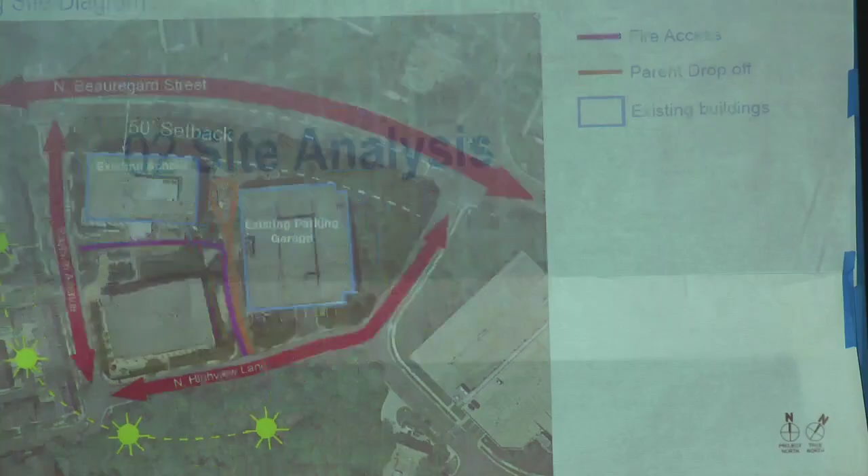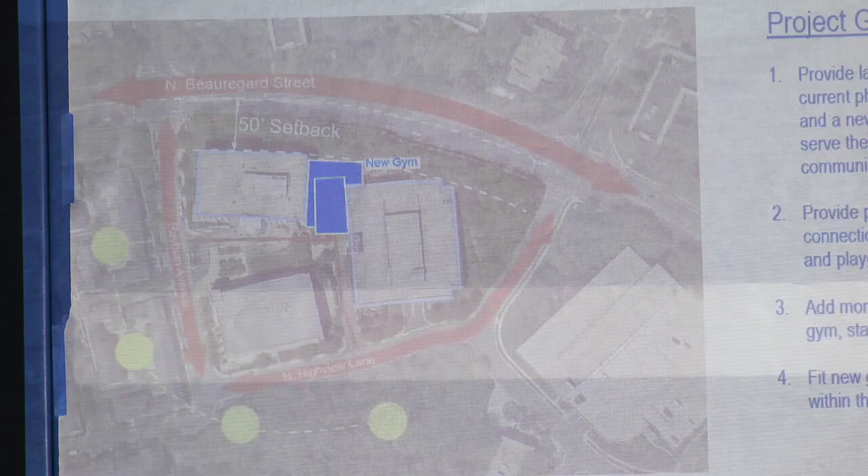So our site, I'll just point to this. We're sitting in the existing school about here. I think everyone knows the garage is here, and we have access and drop-off currently occurring here, and fire and emergency access that runs in this direction. We have Beauregard Street to the top with a 50-foot setback, Rayburn Avenue, Highview Lane. We have the parking garage here, and the adjacent office building here. You see at the bottom the sun angle, so we look carefully at the sun to make sure the building's getting enough natural light.

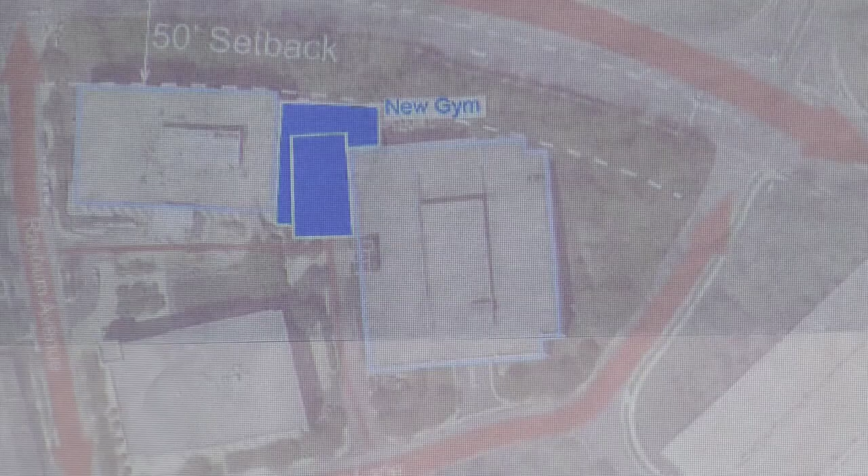This project is in blue, so it's a new gym with the gym volume, the higher gym volume being this rectangle, and then the support sort of around it. It's a pretty clear and clean diagram. The unique thing about it is it's elevated and connecting this building to the parking garage while allowing access underneath.

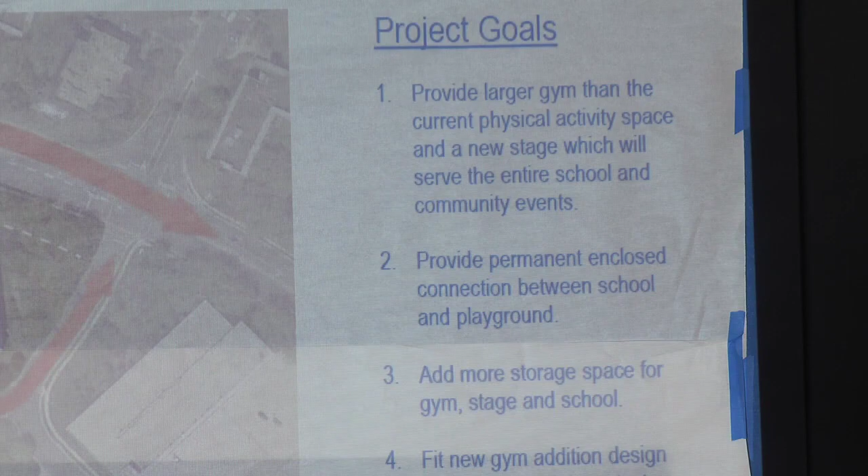There are several project goals we should go through. Provide a larger gym than the current physical activity space we're in—this is that room now. It'll have a new stage, which will accommodate a lot of programs at the school that have been so successful. We'll provide a permanent enclosed connection between the school and the playground. Right now there's a bridge connection on the 3rd floor that connects over; this will be indoor and conditioned. And we'll get more storage space for the gym, stage, and the school.

One of the other goals, obviously, is to make sure it fits into the context. There have been a lot of people we've reached out to and collaborated with, including not only the school system, but the city of Alexandria.

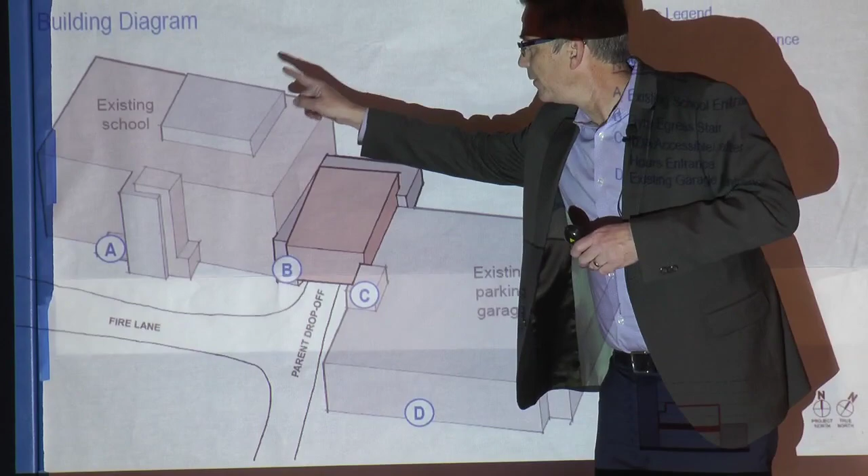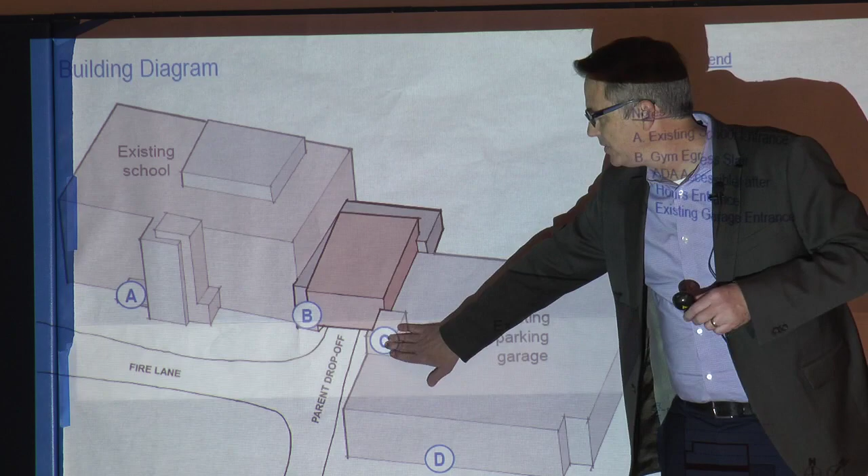So the proposed design, this is the axonometric. If we look at letter A, that's the existing school building—we're down in this location. That's the elevator core and the stair tower we added at A. The gym building is B, with the larger gym volume and the support in the gray color, and in the pink color, the new gym. C is the stair tower to the existing parking garage, and D is the existing parking garage. The building will sit, as I said, between the parking garage and the school building at the third floor line.

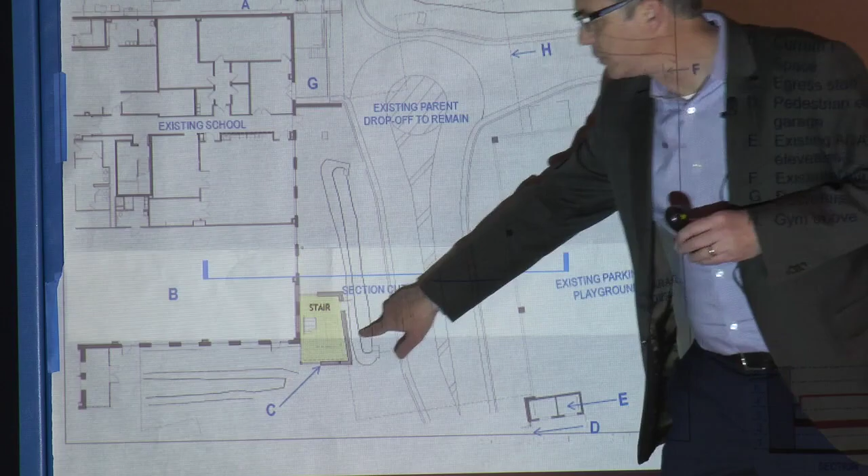Okay, so floor plan level 1. Really, the building has a minimal impact to this level, and it's primarily just this stair. This is one of the emergency stairs out of the gym. There will be a series of columns carefully located around the existing drive aisle and existing stormwater management.

We are utilizing one of the piers, the foundations to the existing bridge.

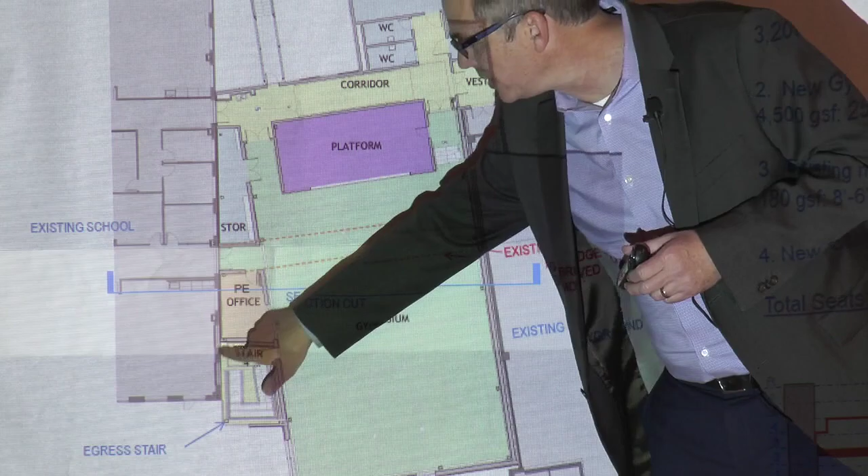The third floor plan, building in addition will connect in at 2 levels, 2 corridor points. One here will go past the PE office, an occupied office, and you come into the main gym space. Below that is a stair, and above it is storage. This will be the platform or stage that will be used by the school.

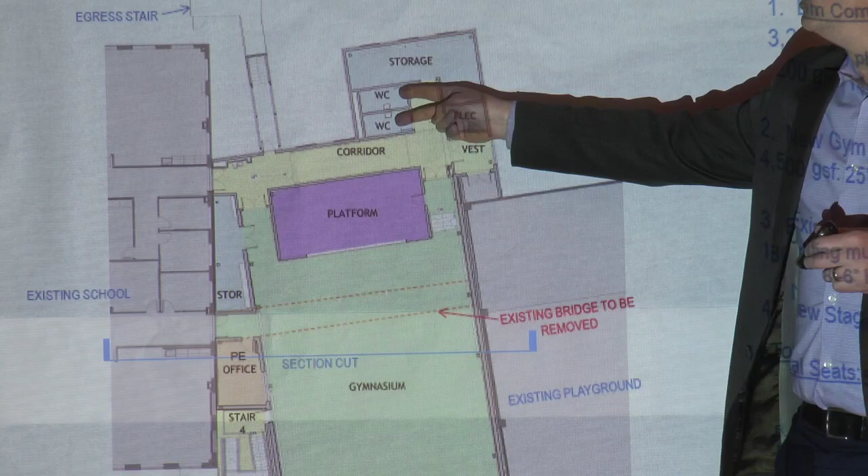Above that is a corridor which replaces the old bridge shown here in dashed red line. That'll be removed and replaced by this corridor, which as I said earlier will be conditioned. Also a couple of toilet rooms here, some storage, an electrical closet, and a vestibule that connects to the top of the existing parking garage, which is where the playground is for the existing school.

There's some specificity here. We don't necessarily need to go through it, but in summary, it's at the third floor, as I indicated before, has a stage, and it's a gym that's right-sized for this school.

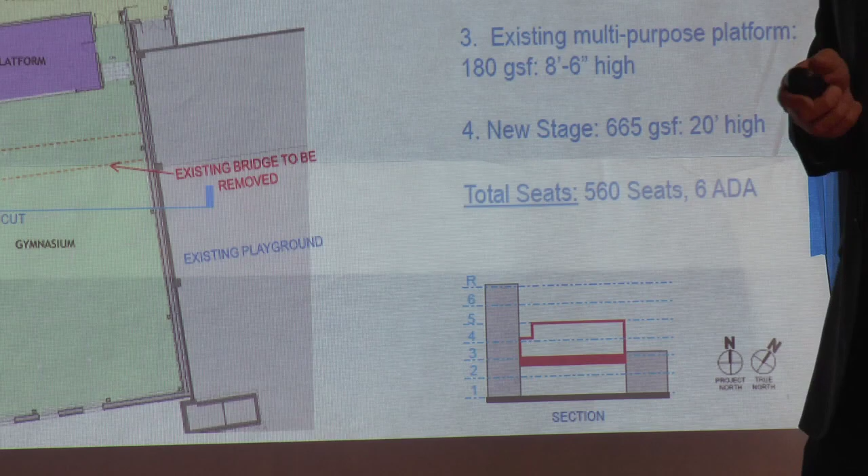On the exterior, when we were looking at the exterior of the building, we looked very carefully at the addition we had done previously when we turned the office building into the school, at least the first 4 floors. We had used metal panel, we had used brick, we looked at the solar orientation and dealt with sunshades and devices. And we also kind of announced its entry with both signage and a canopy that's welcoming, that also provides security for the students to the school.

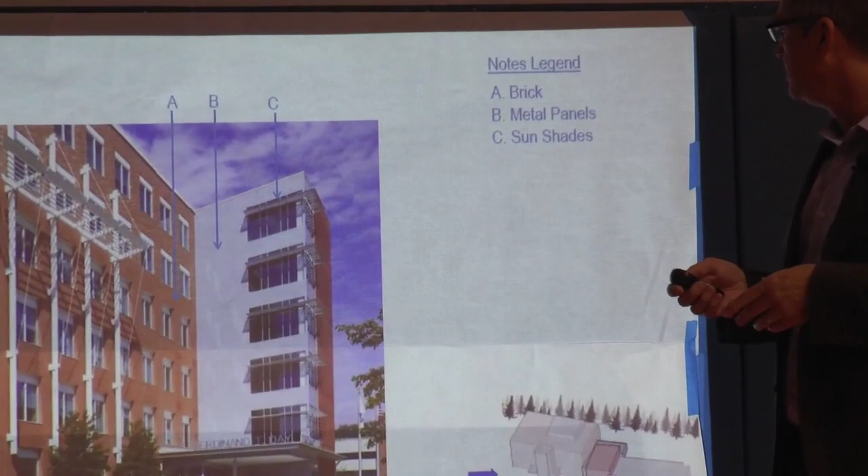This is our proposed design. This is the existing building you see here. This is the gym addition, and this is the parking garage.

You can see what we tried to do is we have utilized a metal panel system for the cladding of the building with a kind of reddish brick color for the main box of the gym, with the support spaces using a gray.

That is the fire stair I pointed out earlier.

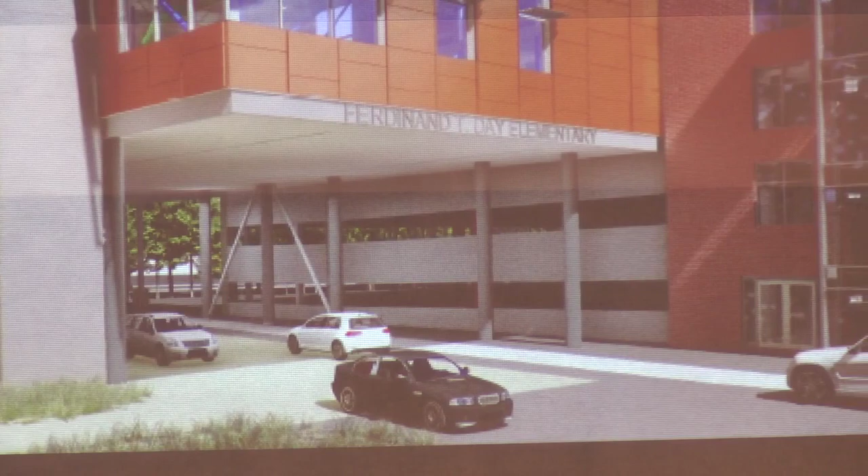A close-up shows you the gym volume that is suspended. It shows you drop off and pick up, which Pete Bloom and I will go into in just a minute, showing how you can drop off and pick up after the construction is complete. We have sun shading devices, as well as nice open views to the sunlight for the students.

And then we have a fire stair that is open and utilizes some of the existing bridge to clad and protect the occupants of that fire stair. This shows you the existing garage core, which has elevators and stairs, and then the parking garage beyond.

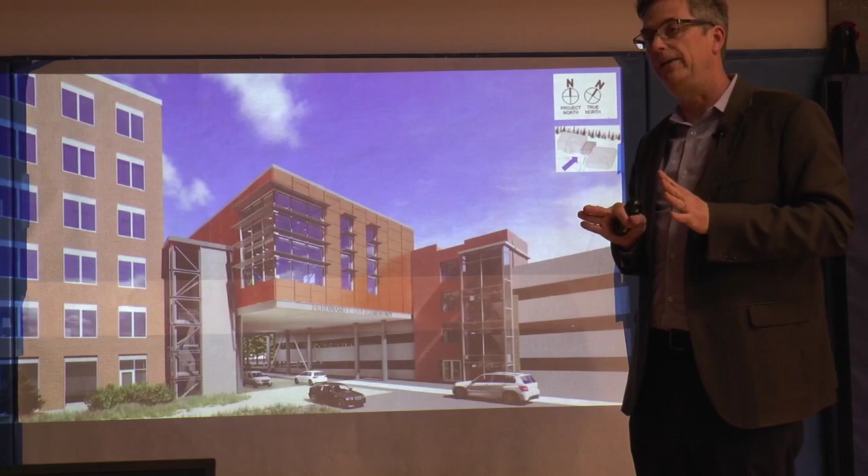The aluminum panel has a texture to it, has a raised sort of vertical fin, and has a kind of staggered coursing. We're trying to tie that back to the original school in both its design concept. When you get to the stair and the other support, it's a more quiet gray metal panel that's stack bond in general. Pete will get into the details in just a second.

Pete, let's transfer this over.

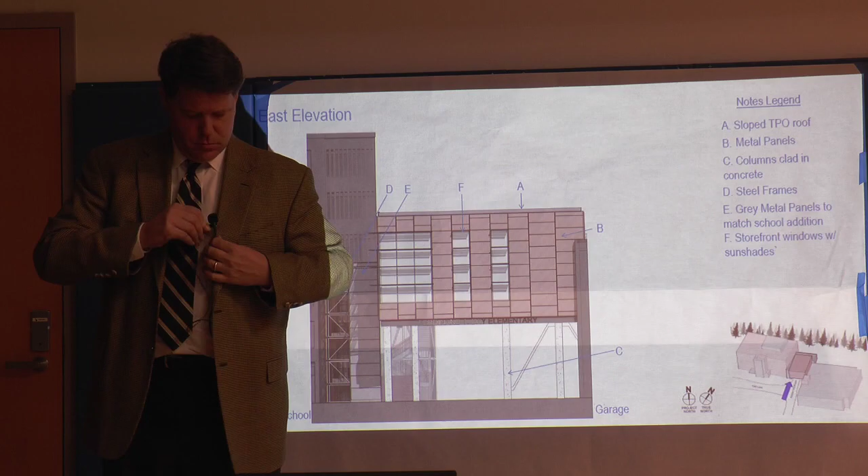Paul said, I'm Pete Bloom. I'm with Hord Coplan Macht Architects. I've been working with the school and Whiting Turner on this project for some time now.

What we have here is a set of drawings. They're kind of abstract, called elevations, and it's a projection of each elevation of the building as though you're floating in the air looking at the elevation straight on.

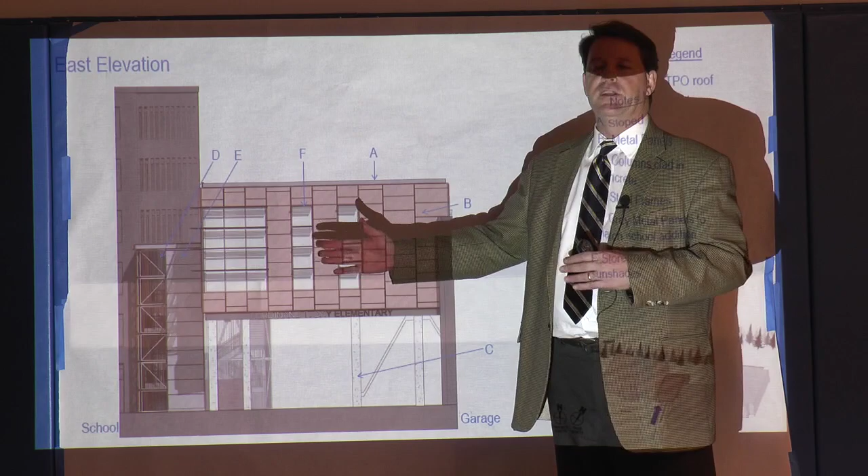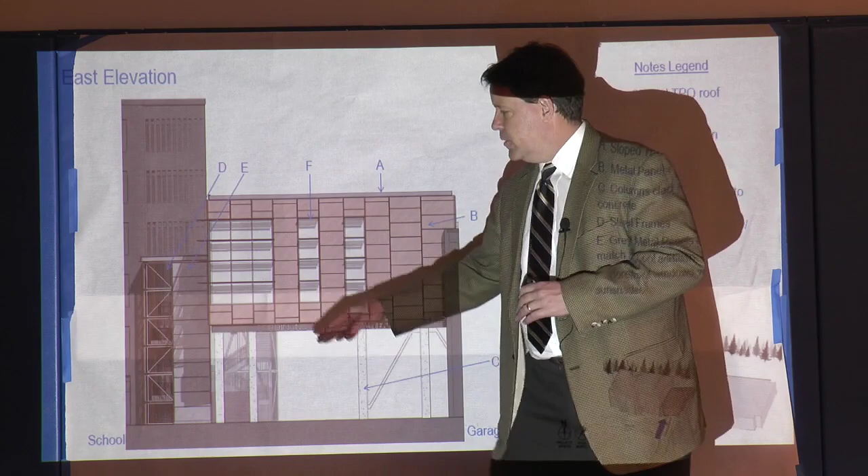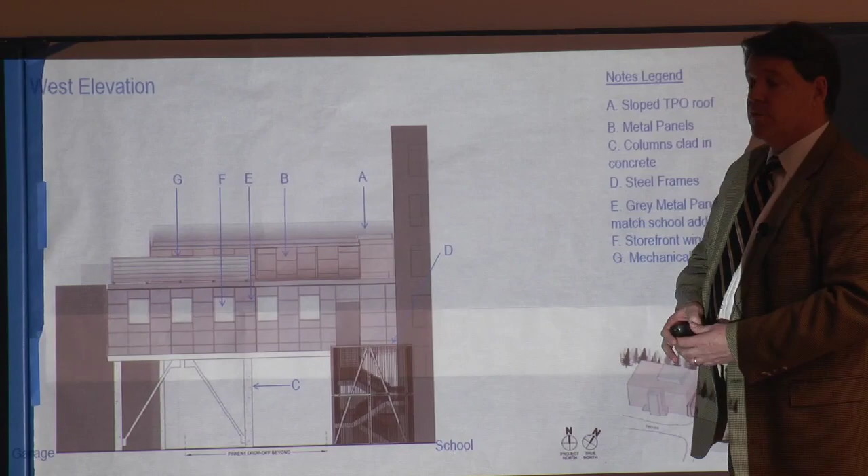This is a view from North Beauregard, the backside of the building. You see there's a one-story element here where we have storage in the corridor that serves the back of the building. There's a mechanical equipment screen up here where we're going to have our mechanical equipment that provides all the cooling and heating for the building. And then you can see beyond that, you have the two-story volume of the gym.

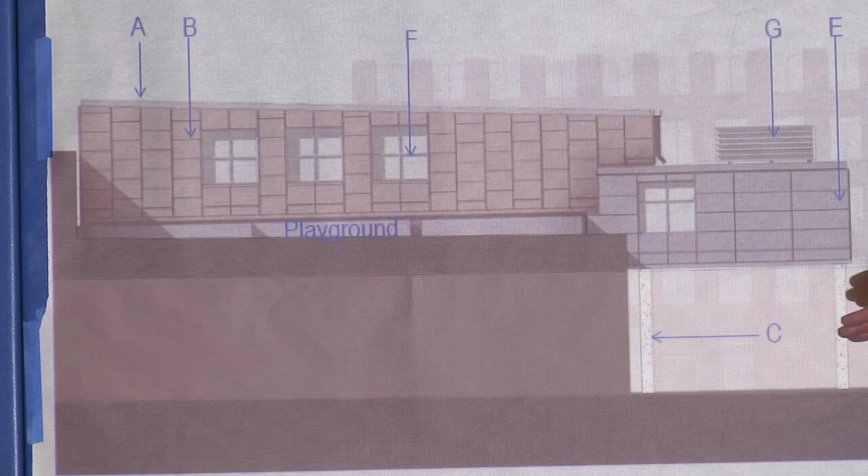This is a view as though you're standing on the playground looking at the new addition. The children's playground is in the foreground. On the top level of the parking garage, you'll see these large windows into the gym. The school is beyond over here.

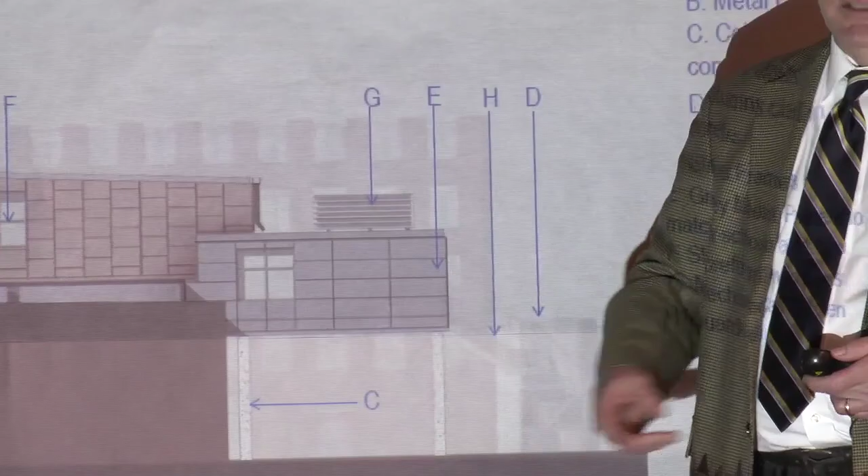Here again you see the mechanical screen, and then this is the one-story element having a corridor that comes out and has a window at the end of it right there. The interiors we've spent a lot of time developing now, and we focus of course on the gym.

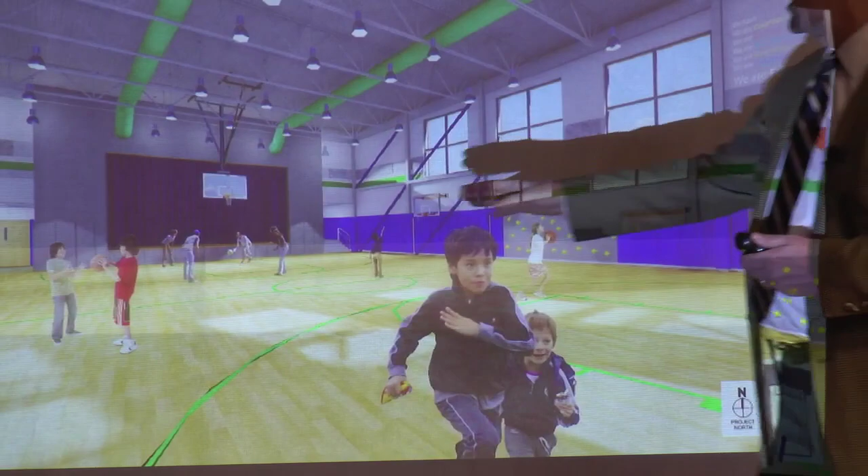This is a view looking from that big window back toward the stage, up toward the Beauregard end of the building. You can see we propose a large stage curtain here behind these play courts.

We'll have basketball hoops in the space, and like this room, we'll have floor markings for soccer and volleyball, with provisions for volleyball sleeves. There will be 2 basketball hoops on each side so they can have cross-court play, and a basketball hoop at each end for full court play. The volleyball court will be oriented the long way facing toward the stage.

Again, you can see that the green ducts are fun. The school's emerging colors are blue and green, so we picked up on that, which is why we limited these accents to blue and green.

We're reusing this climbing wall in the new space as well, taking it down and relocating elements from here to the new space, on the east wall of the gym. And up here, we're going to include a statement about the school, one of the school slogans, in the space.

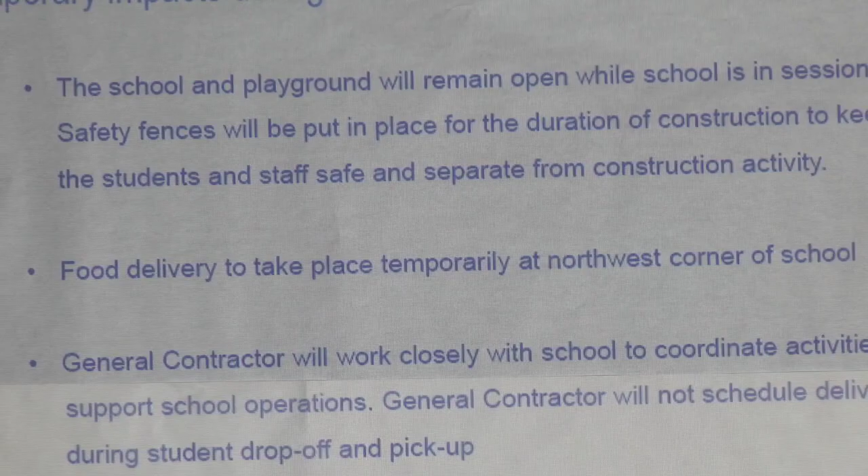During construction, there will be some disruption to normal patterns of activity in the school, and we wanted to address some of those points raised in our first presentation. I wanted to reiterate that the school and the playground are going to remain open while construction is going on. Safety fences will be put up during construction to prevent children, and passers-by, from getting into the site.

Food delivery to the school is going to be disrupted. Its normal delivery place is right here at the end of the parent drop-off. There's a loading dock, and it will need to move to Rayburn Avenue, and we have a slide later that will show you where that is.

Most importantly, Whiting Turner, our general contractor, is going to work closely with the school to work around events and daily scheduling, so they won't schedule deliveries to the construction site during drop-off and pickup times when the site is busiest. They're working closely with the school and ACPS to figure out what events they need to plan around, and building that into their schedule.

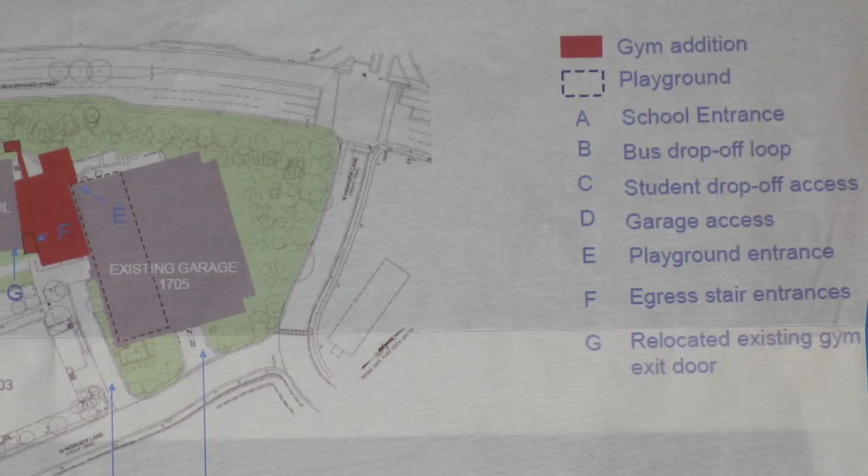This is a site plan showing some of the elements of the site. Over here, A is the existing entry to the school. B is the bus drop-off loop. G is going to be a new door that we're going to put right in the corner of the room over there. We're going to relocate that door to provide access so that during construction, there will be two means of egress directly out of the gym.

This is going to remain the garage access, and this will be the parent drop-off loop access in the future. This is going to be one of the egress stairs, and this is the secondary egress stair. If you want to go to the playground, you'll see we have some other slides—you'll come to this existing lobby where there's both a set of stairs and some elevators.

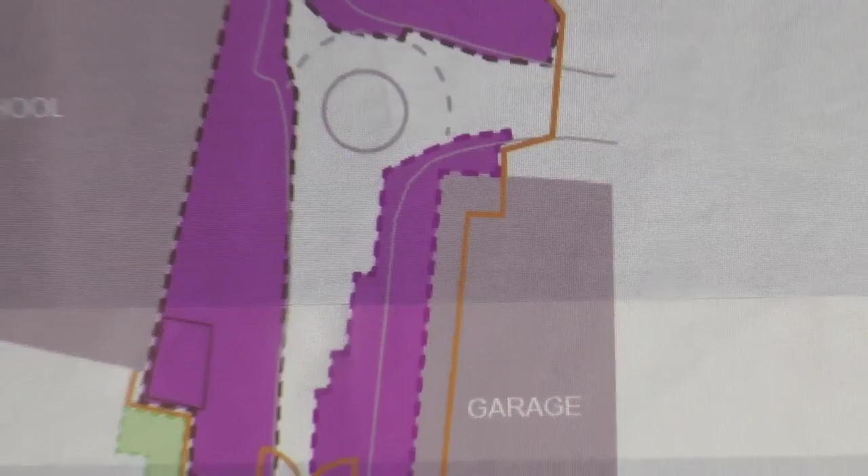This is a diagram showing a blow up of the site you just saw, focusing in on the space between the garage building and the school building. What we've shown is this orange line, which is the limits of disruption to the site.

We'll have a fence around all of that so the children can't get in. The purple area will be the limits of disturbance, which is really the limits of what we think is going to be dug up during construction.

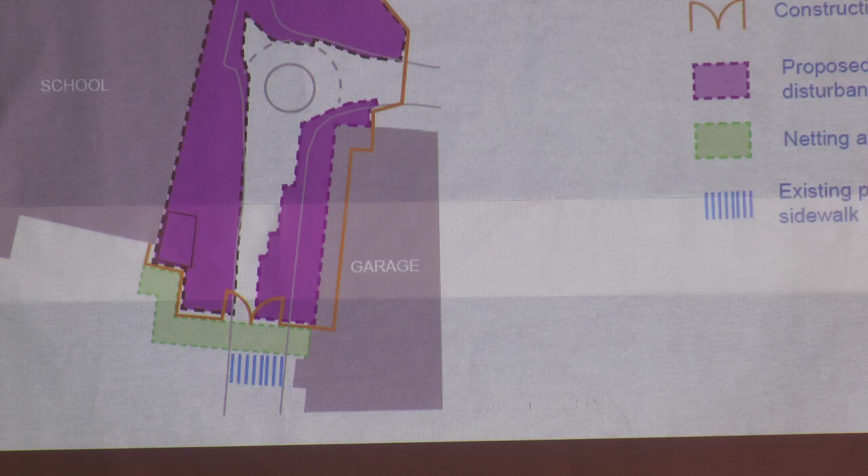This is currently the pedestrian crossing to the garage, and that's going to remain open during construction. Students will cross across here, and in order to provide as much safety as possible, there's going to be construction netting hung off the south facade of the building to capture any items that might fall.

And then this will be the proposed construction entrance right here.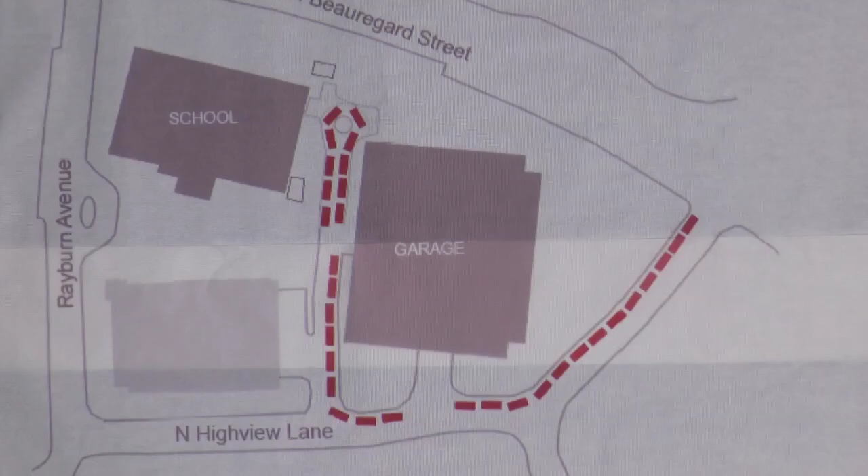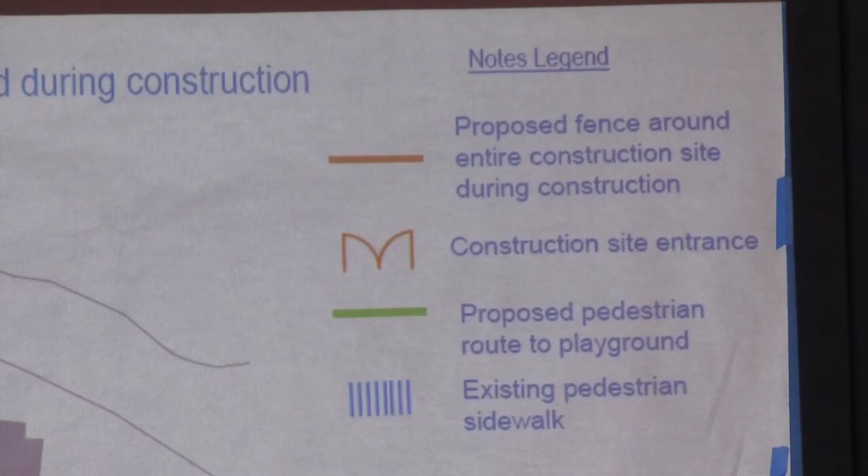Importantly, the children won't be able to use the bridge over to the playground because that's one of the first things that has to come down. But during construction, their path to the gym or playground will be safe. They'll come out the front door, walk down the sidewalk, come across the pedestrian connection, and then use the stairs to go up to the playground. So that's going to be protected.

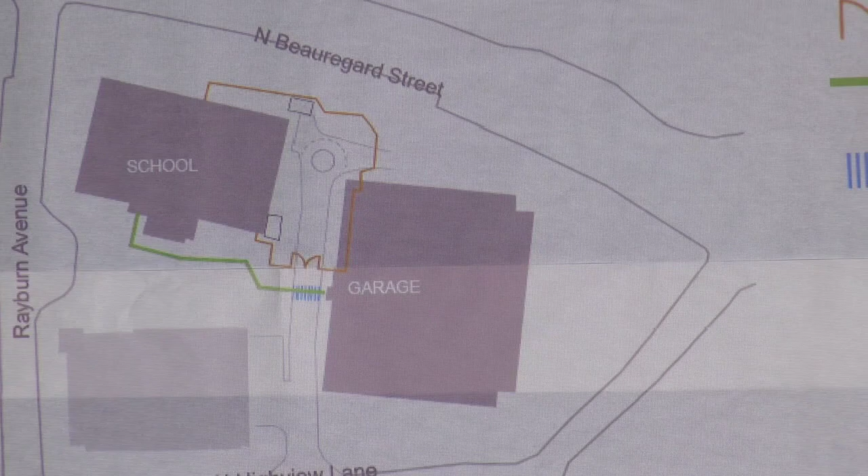Again, as I said, the netting will be over here so that if there were any stray debris, it would be caught.

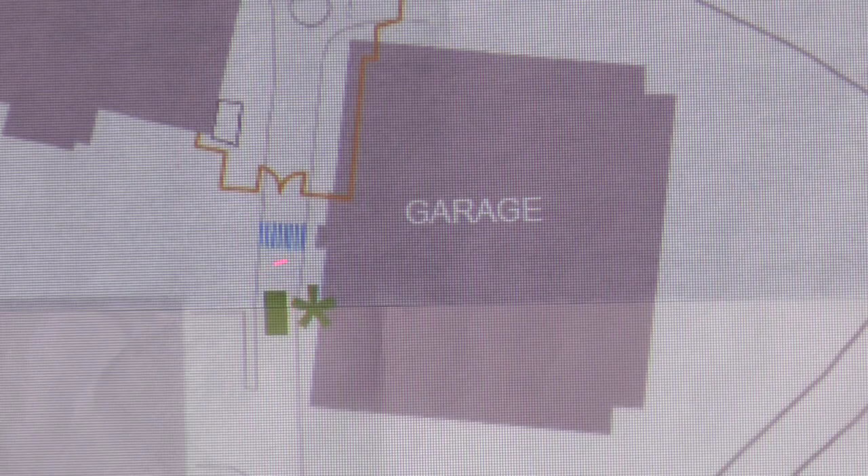This slide shows some of the temporary changes to things like dumpster location and food deliveries. Because the current location for the dumpsters, both garbage and recycling, and the food loading dock, won't have access during construction, we're proposing moving the garbage and recycling to temporary pads on site that trucks can back up to or pull into.

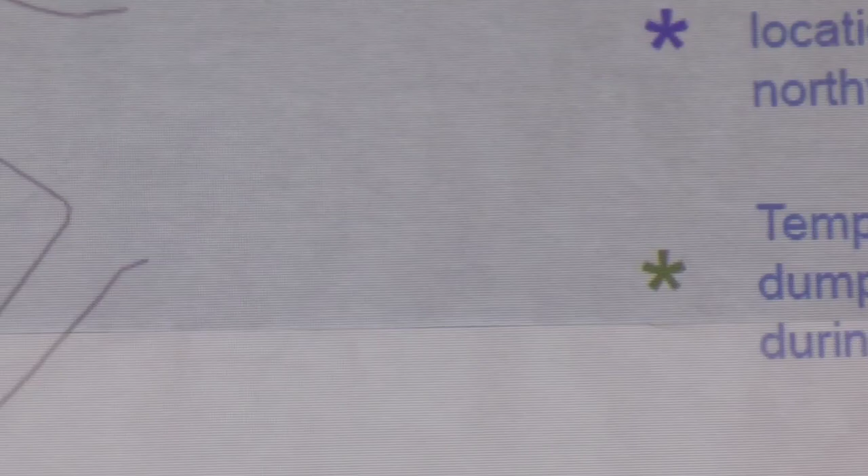Over here, there's a location just off Rayburn very close to a door into the cafeteria and then the kitchen, so we'll be able to have food deliveries there temporarily that are very close to the school. They don't have to travel very far, and they're at the same elevation with a sidewalk right from the street to the actual kitchen.

So those are our proposals during construction for those temporary measures. And the process is ongoing.

We are working on an upcoming presentation for the zoning commission and later on the city council in March. We're continuing to work on the design, and the permitting will be ongoing at least till the beginning of summer. Then in the summer they want to begin construction, and we hope to complete the building in the winter or spring of 2021.

Yes, I just have a couple questions. The playground—how is that going to be affected during construction? Is the fence high enough to protect it, or are the nets going to be up high, extending the fence higher to protect the playground?

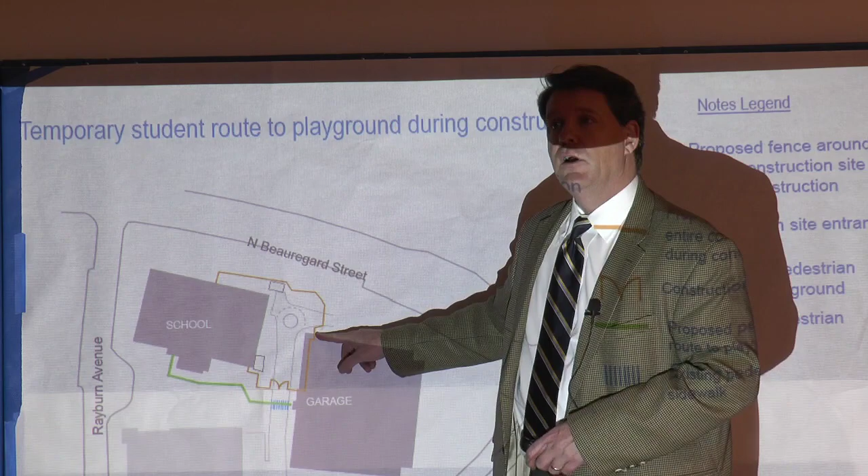What's going to happen is there's going to be a temporary orange fence—this orange line represents a fence built on the playground itself, so we will build a fence to keep the children away from that side of the building. We'll have some construction activity up here, and this fence will remain as long as necessary during construction.

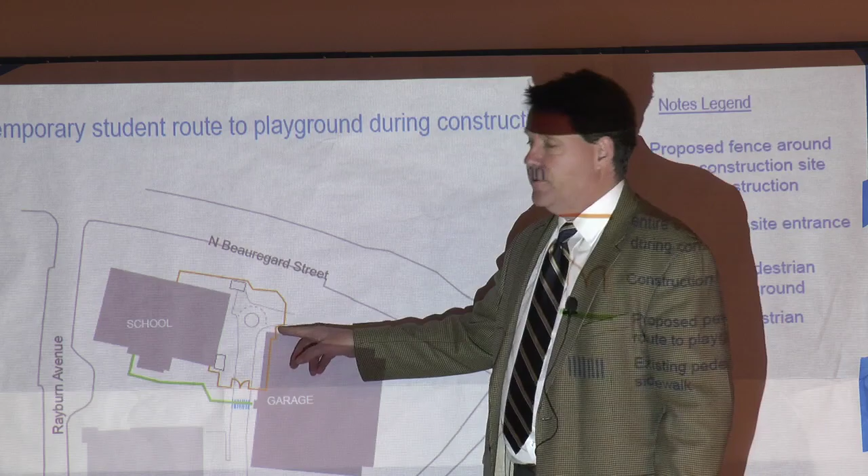Now, something else I noticed in the pictures of the new gym—the windows on that side are kind of, I know they're big windows, but they seem like smaller windows to me.

Part of what I like now is how visible the playground is to the school, but I feel like the gym blocks that. It kind of secludes the playground. Is that just in my mind, or is that something real?

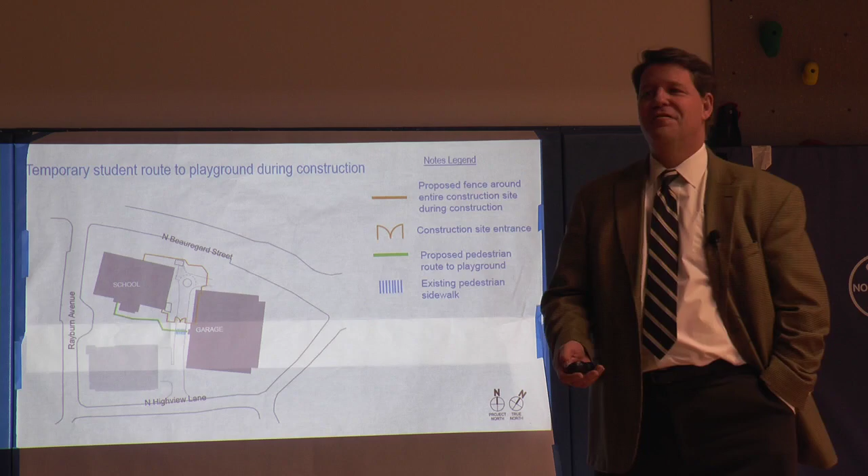So you will be able to see the playground from the corridor because of the window that's in there. We also have video cameras out on the playground, and security staff that patrols when students aren't there. So it's not really secluded, you still have visibility of the playground. Yes.

I really like the tree line back there because it keeps the school separate from the main road. Are you going to affect that at all with the new construction?

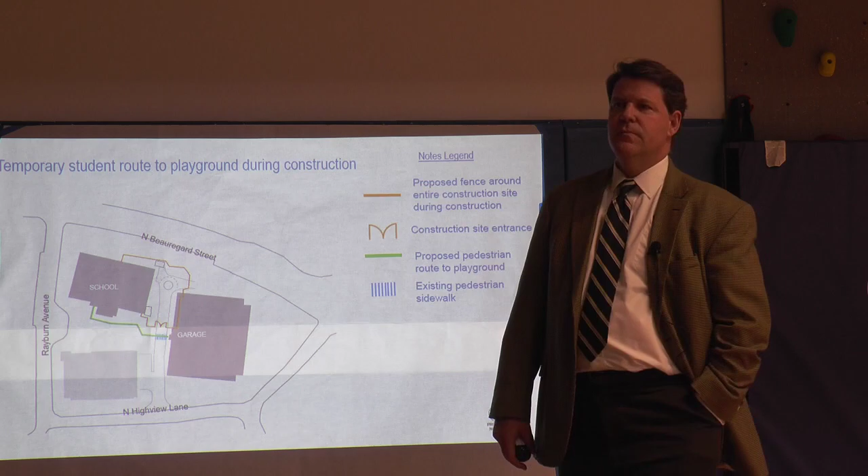No. Along Beauregard, there's a 50-foot requirement for a building restriction line, and this buffer is completely protected. Nothing we do will either permanently or temporarily go into that zone. This new stair is the thing that comes closest to it, and even that's clear of it. So all these trees are going to be left alone, and you'll have all that tree coverage.

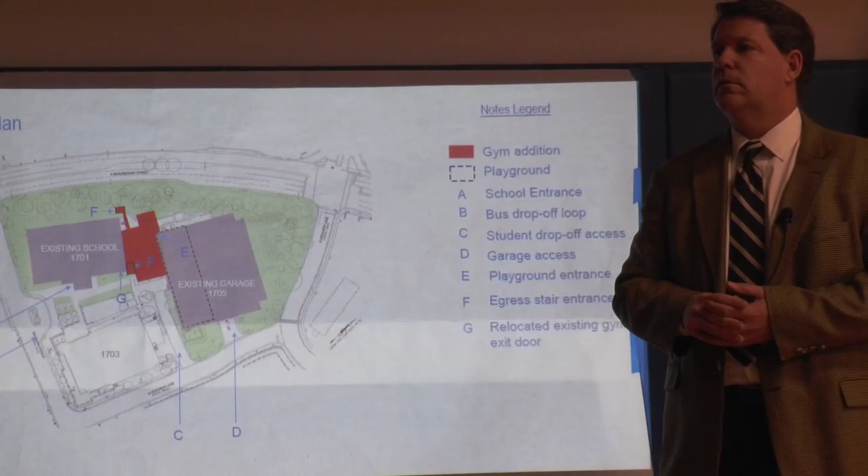In full disclosure though, there are a few very small trees that will be impacted that are planted along the garage itself. Okay, I was just thinking of the majority of that line back there.

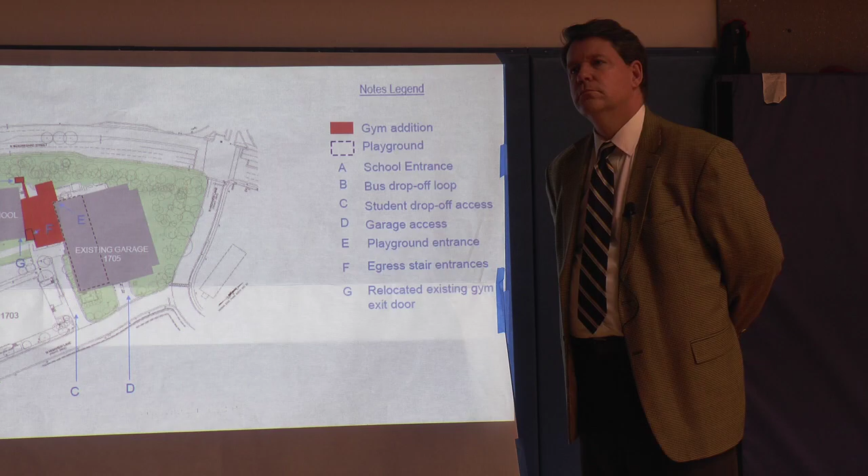Is the top of the parking garage going to be completely blocked off once the school is built, to keep the playground private to just the school? Because I know there's some spots up on the top of the garage, with the gym being in the way between the school and the parking lot. I know it's really secure up there, but...

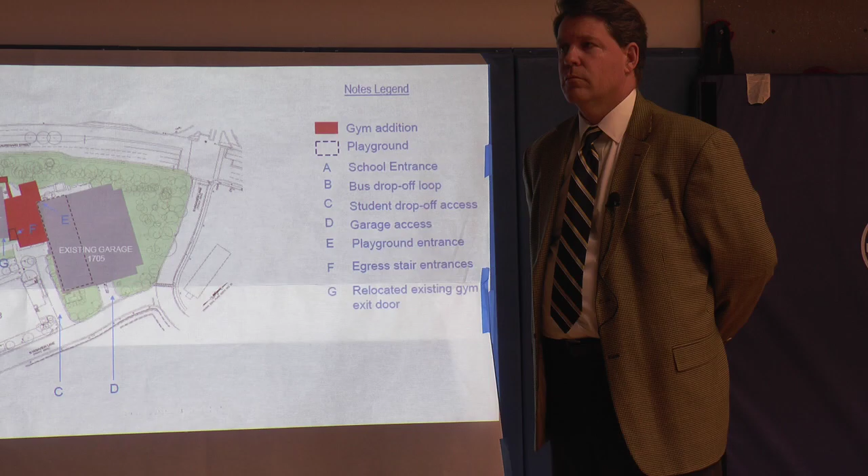What will remain up there are the existing egress gates used if there's ever an emergency on top of the playground and we had to evacuate that space. We have multiple areas with push bar systems where staff and students can get off the playground and come down through the stairwells, not even through the garage. Since the playground was built, additional work was done with safety and security to make sure you couldn't push those push bars from around the corner, to help with that. We also expect to relocate or put in a new security camera on the building as well, on the playground.

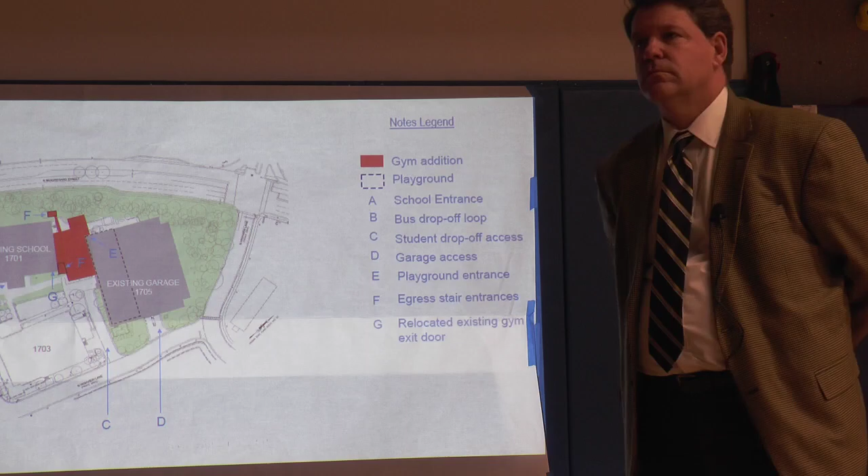Anything else? I'm excited. I'm really excited. Oh, that's great. It's wonderful to hear.

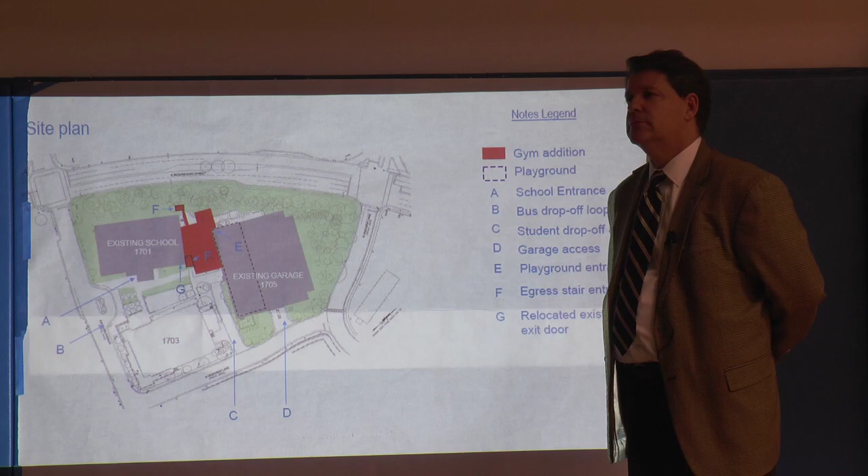I think one of the things a couple of parents have been asking about too, since the playground was built, is shade. And from having the building where it's located, it will provide some additional shade to the playground space at certain junctures. The height of the gym is substantial, a good 15 feet above the top of the playground, so as the sun comes around during the day, you're going to have a lot of shade on this side of the playground.

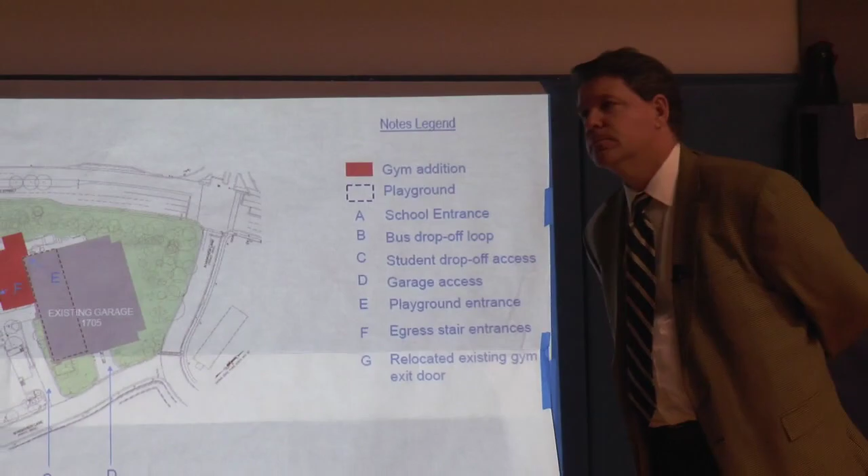Now, how long do you expect the traffic to be impacted from construction? Obviously probably until it's complete, but right now there are some safety concerns of my own, just walking along Rayburn and across Beauregard, with the added car traffic to what's already there. Is there going to be extra security, or can we get police officers out there to help direct traffic and write citations for people who drive through crosswalks when people are walking?

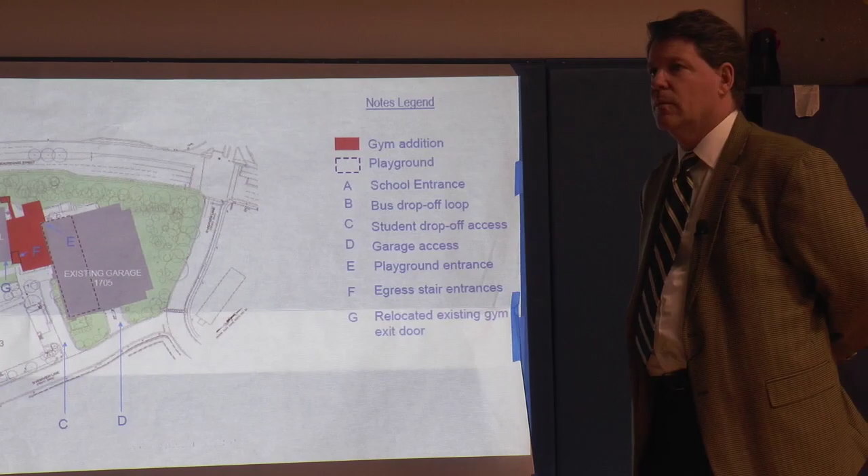Well, Rachel, correct me if I'm wrong, but right now the city does provide officers to control this intersection — actually not police officers, they're parking enforcement officers. They can't do anything, they're not taking license plates or anything like that. I saw a guy get bumped by a car a couple weeks ago and the parking enforcement did nothing about it. They're only allowed to cross children, and in the morning with the extra school traffic it's super busy — even adults, people aren't paying attention coming through those crosswalks.

To my knowledge, that's not intended to change, and there's not going to be any additional traffic to the site except for actual construction workers.

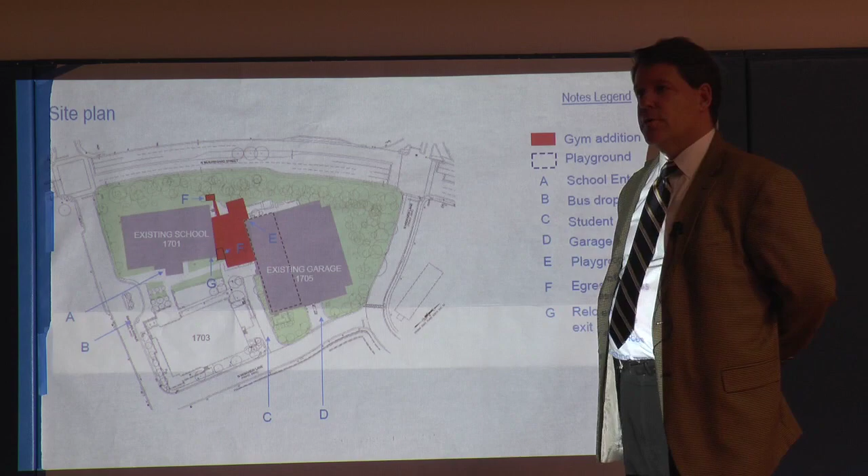Bringing the extra traffic around the front of the building instead of up into the loop will add extra cars on Rayburn, causing extra vehicle traffic in the mornings. It will change the pattern. Instead of everyone coming out this way and going back out this way, people will be able to continue around this way, take a right there.

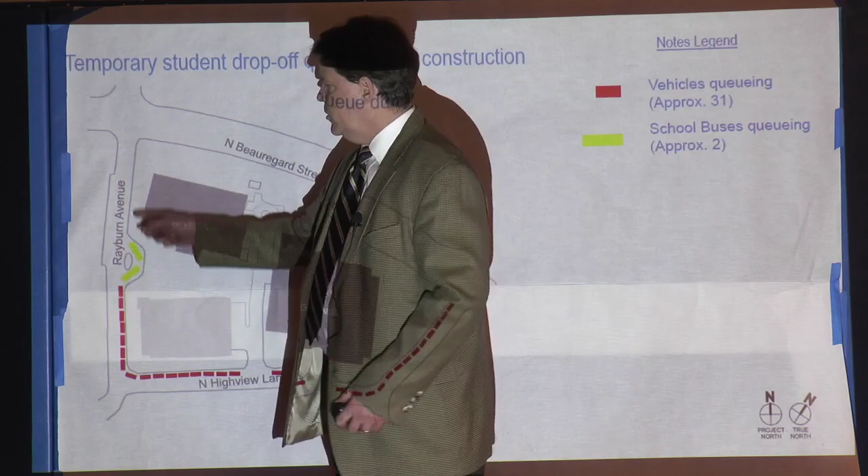My concern is I live in this community over here, and I know a bunch of other parents do too, and already the cars that travel up and down this road, it's already stressful. Are you talking about adding vehicles on this cross right here? Yeah.

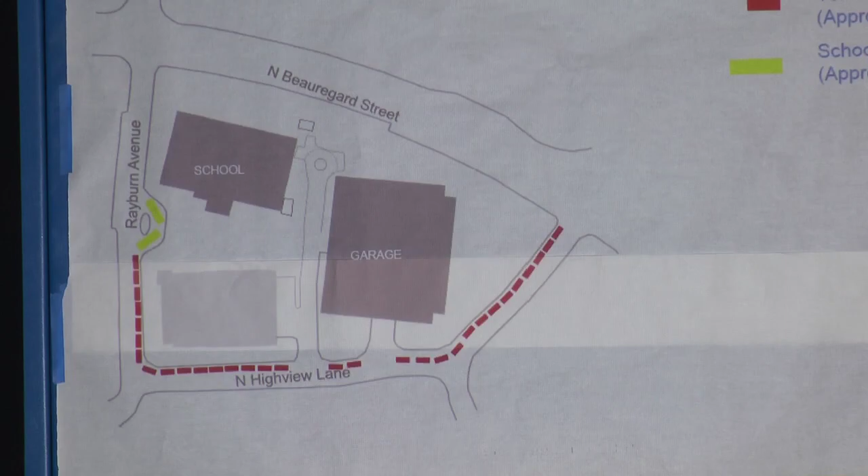We can pull up what the current traffic plan looks like. I have it and I can pull it out. But in our conversations a couple weeks ago, when we spoke with the fire department, and also invited the police department to discuss traffic flow and patterns, we did bring up some of those concerns.

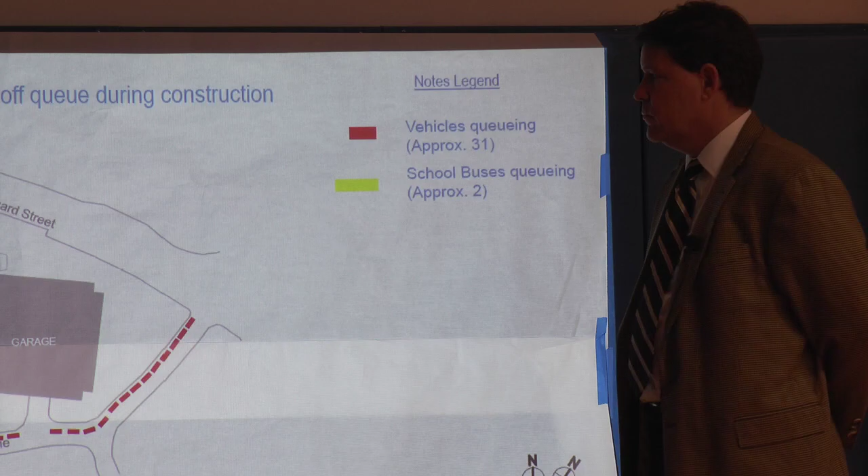Right now we have one staff member out with parking enforcement, a crossing guard at the corner of Beauregard and Rayburn. We have a staff member near the bus loop where parents are making illegal three-point turns in the middle of Rayburn. And we have anywhere from 3 to 4 staff members down outside the parking garage and parent kiss-and-drop loop to help ensure parents are following the traffic pattern we agreed to with the city. We're in continual conversations with our security office, and they're in communication with the police to see what else we can do.

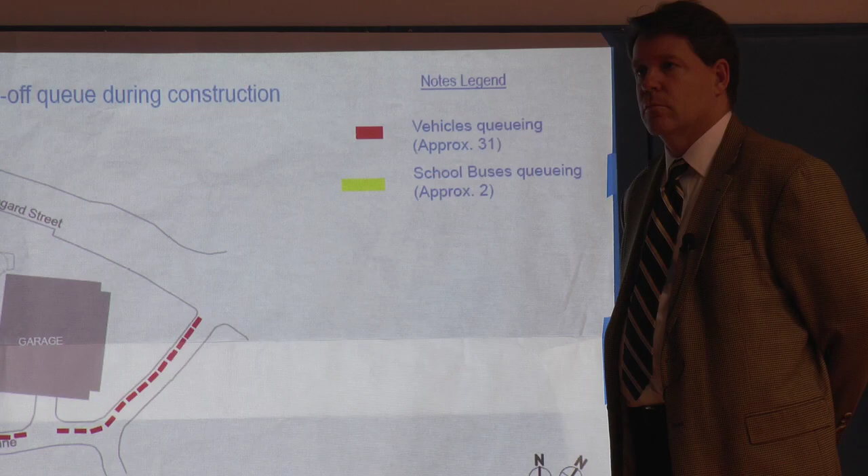I've had a couple conversations with police officers who have come by. There was one day we actually had a patrolman filling in at the corner, and they were able to come and talk to a couple parents. My hope is that we'd be able to have that happen on a more regular basis, to help ensure the safety of our students.

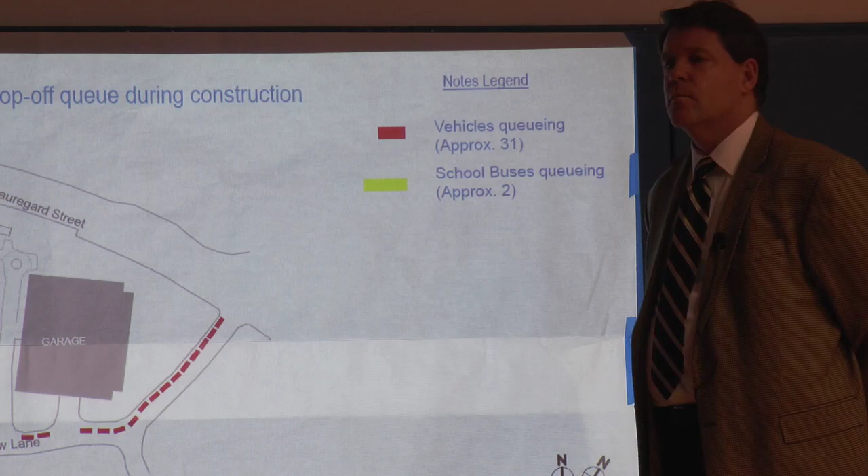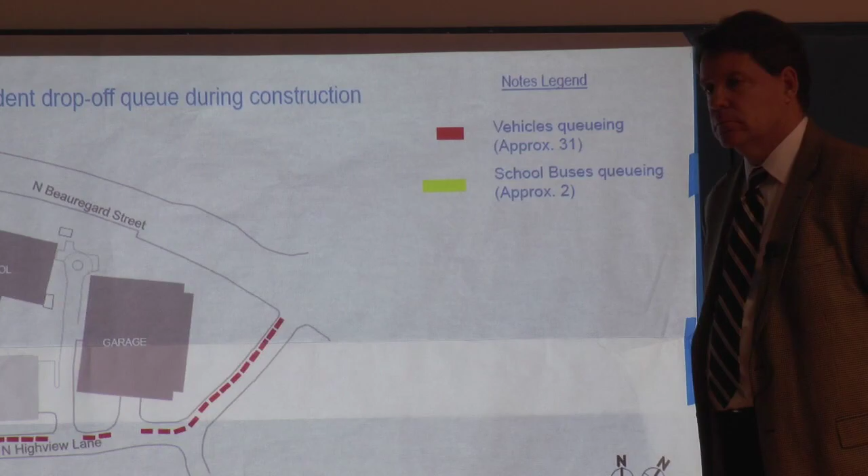Another big reason we're doing a lot of this early is that if this is going to be the new traffic plan, we want multiple forums through PTA and parent groups to communicate what the plan is and isn't, and get all these drawings out to the community as soon as possible, so that when September comes we can mitigate any confusion. I feel like the teachers and staff here have a place to be in the morning whenever my children are arriving - I don't want them out in the middle of the road trying to cross.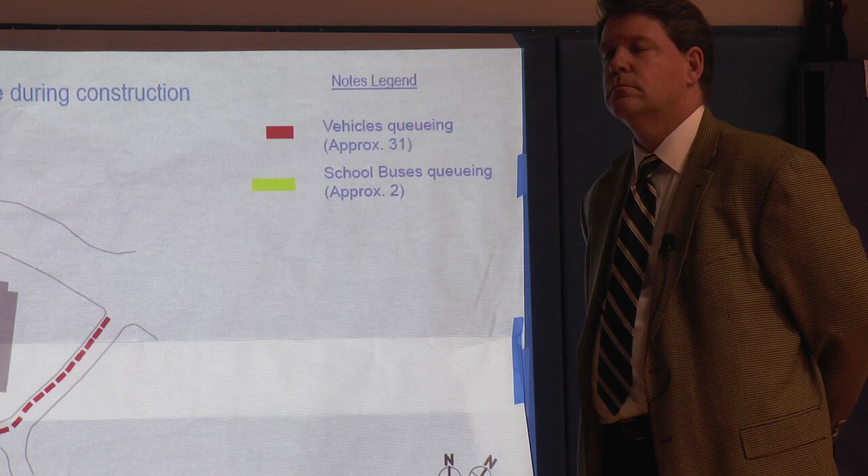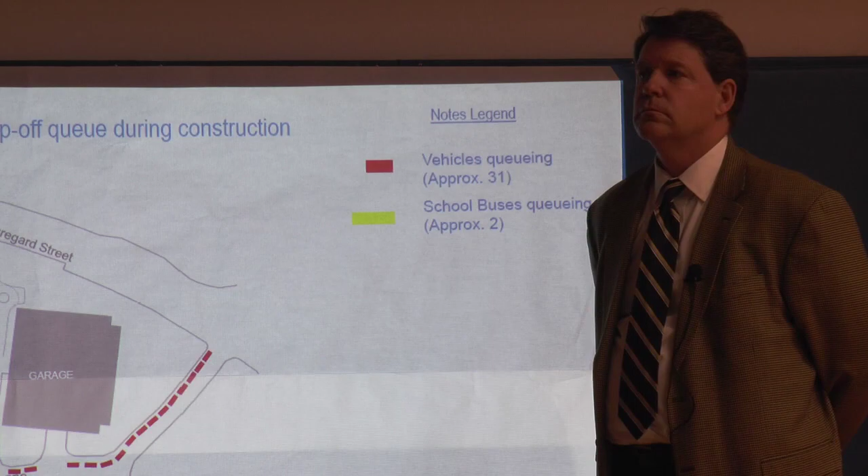All they can do is tell the parents you can't park here, or you have to keep moving, stuff like that. They can't really enforce anything, and parents are like, whatever, what are they gonna do? I feel like there needs to be a presence of someone who can actually enforce this plan. These teachers are out here, and it's bad on this road in the morning. Adding more vehicle traffic just makes me nervous, that's my concern.

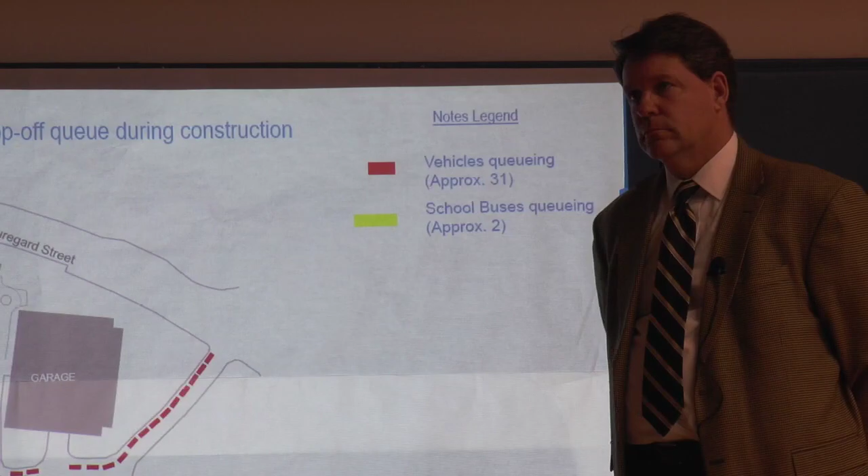So when we talk about this, I recognize the difference between having a trained police officer there to help guide traffic versus school staff. What will change with this plan in terms of staffing is we'd probably reduce the number of staff members on the side where the garage and parent drop-off are, to ensure we keep the garage clear for parents parking there and leaving.

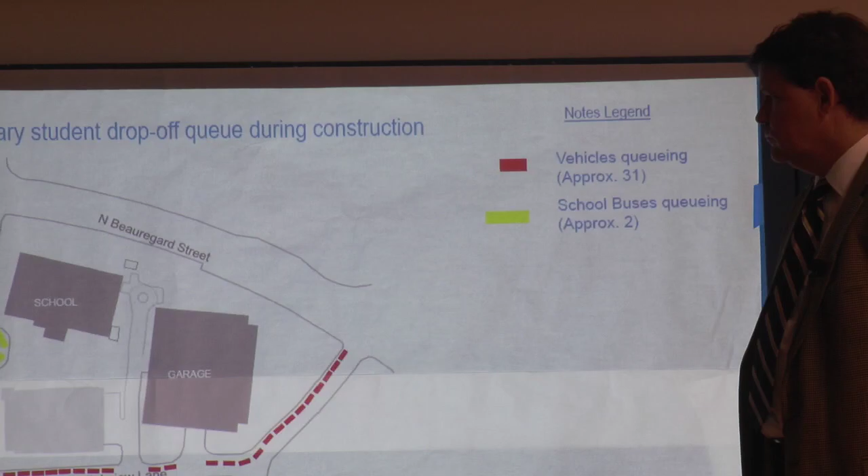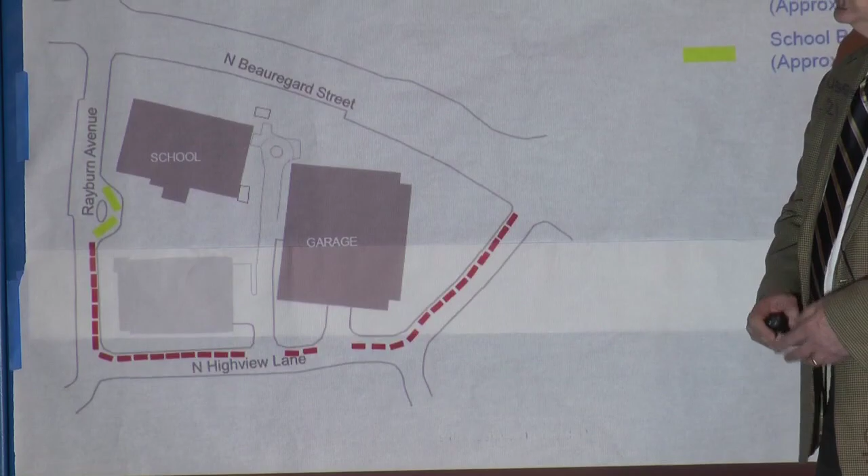That flow of traffic would remain out Highview - anyone parking in the garage would still have all that traffic go back out through Highview so we're not putting additional strain on Rayburn. The additional staff members we previously had over here, we'd move over to this side, because what's going to be critical on this plan is that traffic now is only moving in this direction.

That was the original goal too, for traffic to come around and not down Rayburn, but come around Beauregard and Highview and back out. Even now, there should be no parents turning, whether left off of Beauregard, right off of Beauregard, or straight across the street.

No parent traffic should be coming down this side. That's what our current traffic plan says, that's what's been communicated to families, and that's what our staff, like Ms. Niedermeyer, have been telling parents they can't do. But there was only so much she could do out there on top of them. Nobody listens. They come around, loop around, and park behind this building because they want to avoid traffic. I get that, I really do. I've been a parent late and having to hurry, but there are other walkers to consider.

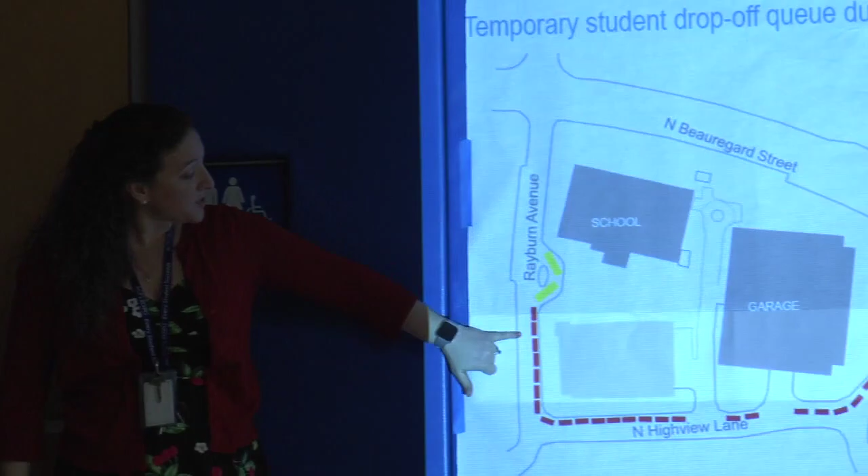I wholeheartedly agree with you, because I've stopped cars from doing 3-point turns in the crosswalk right here while kids are trying to cross. And we have kids sometimes crossing by themselves down here where there's no crossing guard. That's something we can control to some extent, by talking to the kids and telling them they have to cross where the crossing guard is unless they're with a grown-up.

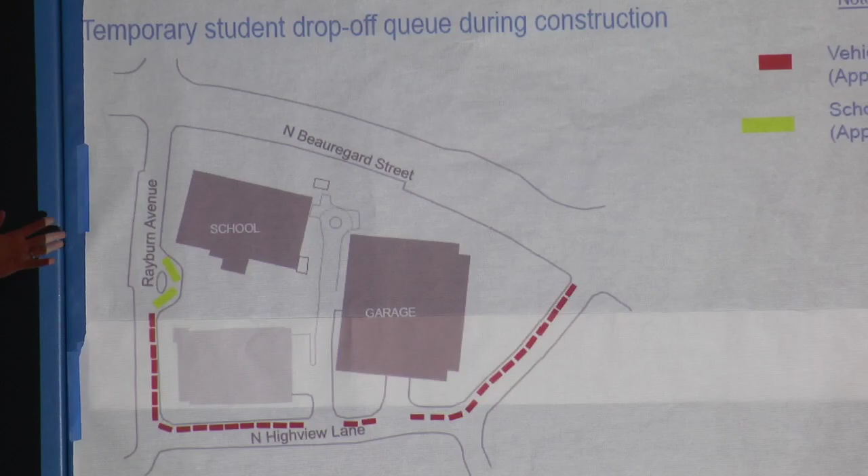We would reroute these staff members over here. In addition, we'd have all of our staff members currently in the drop-off loop opening doors and helping get kids out of the cars. They would then be over here after the buses leave, so there'd be more of a staff presence on Rayburn. We'll continue conversations with our security department, and hopefully they'll be able to continue those conversations with the police department in the city to see how we can get additional support to ensure the safety of our students.

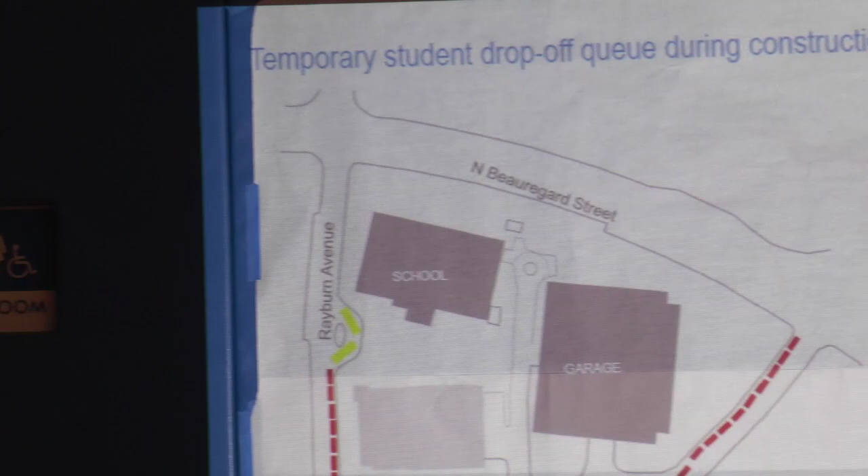So is traffic going to be held, stopped before the bus loop until the buses leave? So the plan would be to put up a sign.

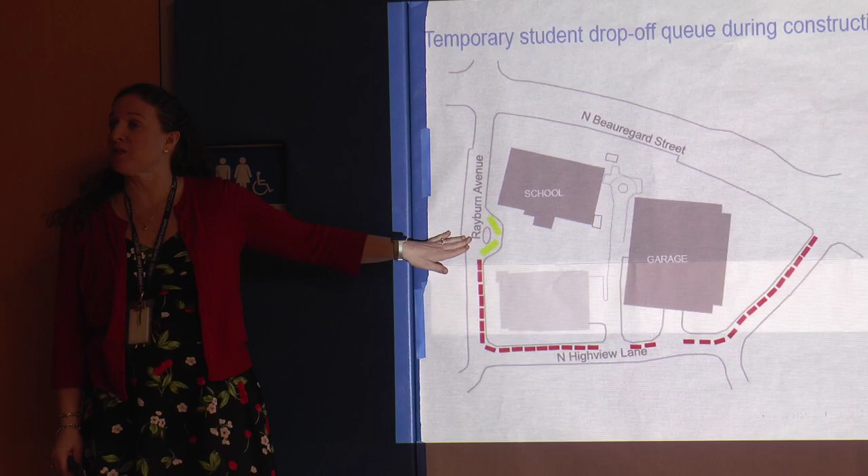Parent drop-off line begins here. This road is more than a 2-lane road, so no matter how many families are lined up here, the buses will still be able to get around and into that bus loop, which we'll continue to block off with cones until the buses arrive. The buses can pull in, and once they drop off the kids and are gone, we can remove the cones and have the line move up here until we're ready to unload all students.

As of right now, on a normal day, the buses are getting here around 7:30. I'd say anytime between 7:20 and 7:40 is our prime window for bus drop-off, but they're here pretty consistently unless there's a major delay. Both buses end up coming in the morning at 7:30.

By 7:35, when the buses are unloaded, we'd actually be able to move that line up a little bit, and then we'd officially start opening car doors at 7:45.

So parents will be able to pull up and park until 7:45? They'll have to stand and stay in their vehicles, just like we tell them now in the parent drop-off lane. They have to remain with their vehicle, but we'll let them pull through. It's not going to be parking, it's going to be standing.

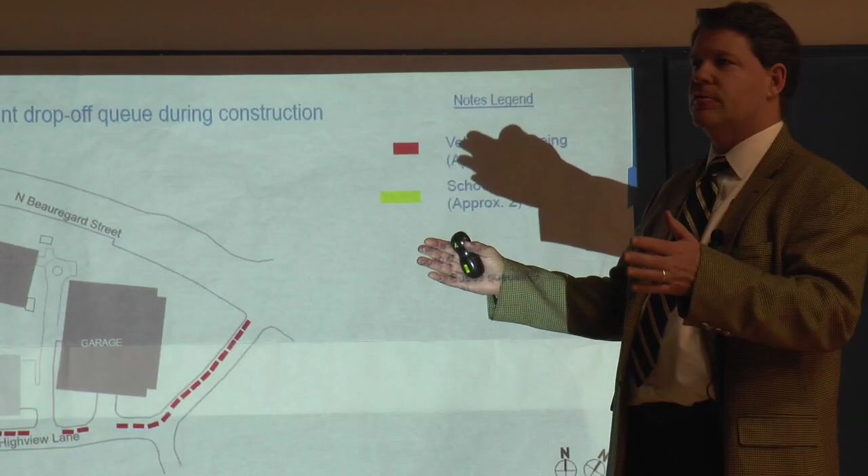Right, okay. And currently this dimension along here is striped, so it's like an extra lane that's striped off. You'd be able to drive through that when you're standing and waiting, and it shouldn't block the flow of other traffic. So if someone in your complex was coming out here, they'd still be able to make a left and go up Rayburn because these cars aren't actually in the lane of traffic.

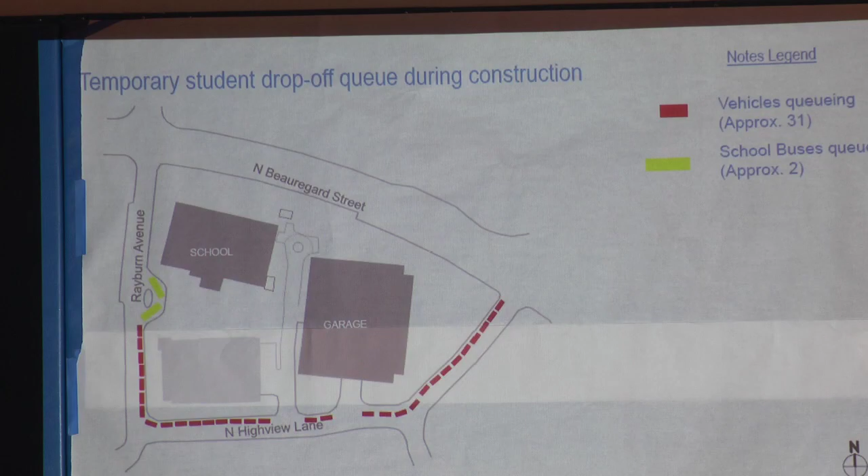Now, does it make a difference? I know that's a fire lane right now. Is that going to stop being a fire lane, or will it stay a fire lane? Here you mean, or the signage here? Both. There are signs up that say no parking, fire lane. Is that going to make a difference? It's still not temporary parking.

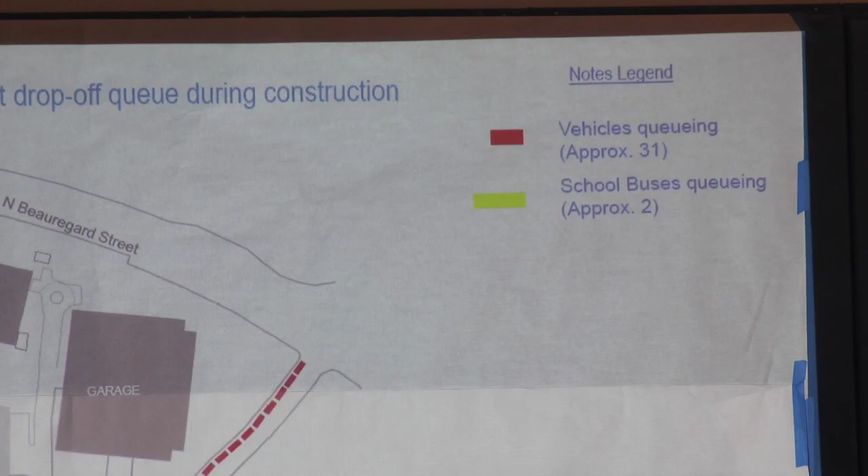Right, okay, all right. So theoretically, in the event of an emergency, since they're still in the car, when the fire marshal looked at this, if the parents are staying in their vehicles like they're supposed to and not parking in those spaces, they're still able to move out of the way just like you would on a road if an emergency vehicle was coming out. All right, my house is on that road, need a fire lane.